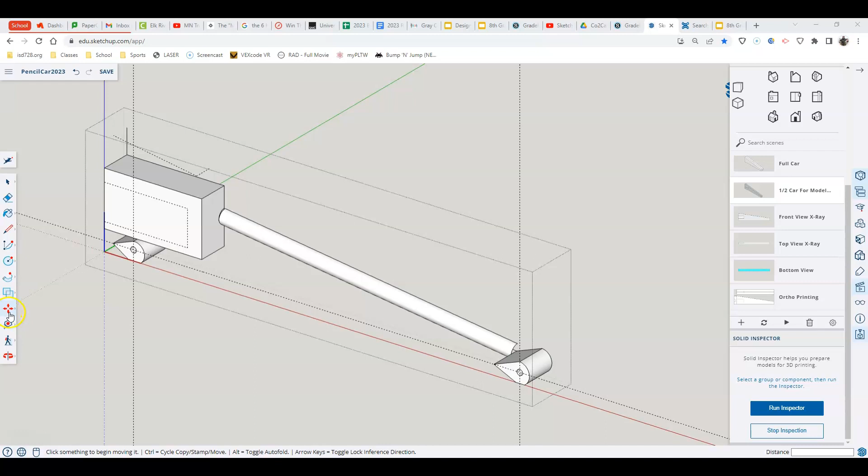Now how we're going to do this is a little bit of combination of the move tool, drawing some shapes and some push-pull tool, but I'm going to start with the move tool, and what I'm going to focus on is this back little edge right here. I don't have anything selected right now, I am double-clicked in already. What I want to do here is match up these points with these little existing points with the move tool, and pay attention. If it makes a mistake, edit, undo.

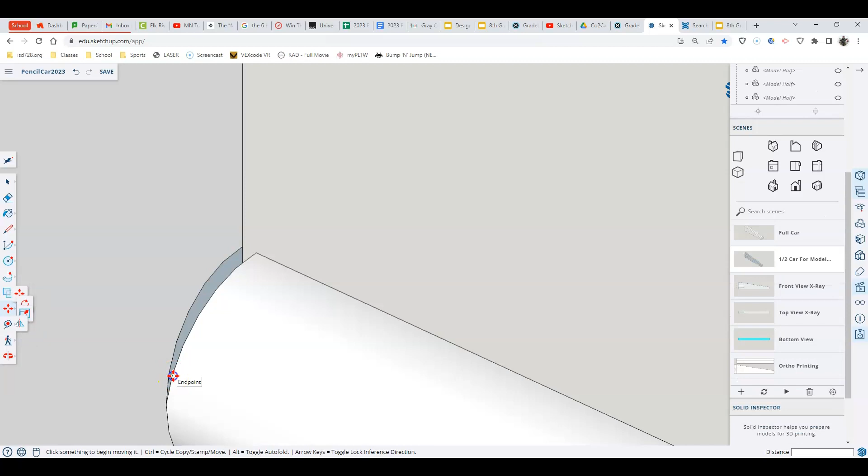So what I'm going to start by doing is just selecting the edge, moving into that point where it snaps to. Slide down until you find the next point, do the exact same thing. So it's kind of like just putting the seam back together. If it looks funky, edit, undo, all right? And I'm almost there. And we have that right where it needs to be.

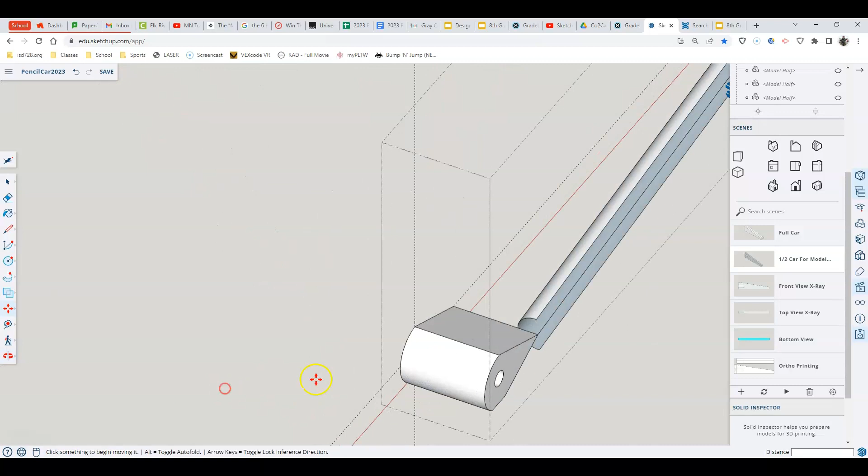Now the next thing is down here in the bottom edge. We could try to do that, but most likely it's going to get a little messy because the shapes are not that similar. So in here, I'm going to draw a circle, and then with that circle, I'm going to pull that forward to connect. So circle tool, hover over the inside right here, should give me access to the middle of this point. At the same time, it's not working for me.

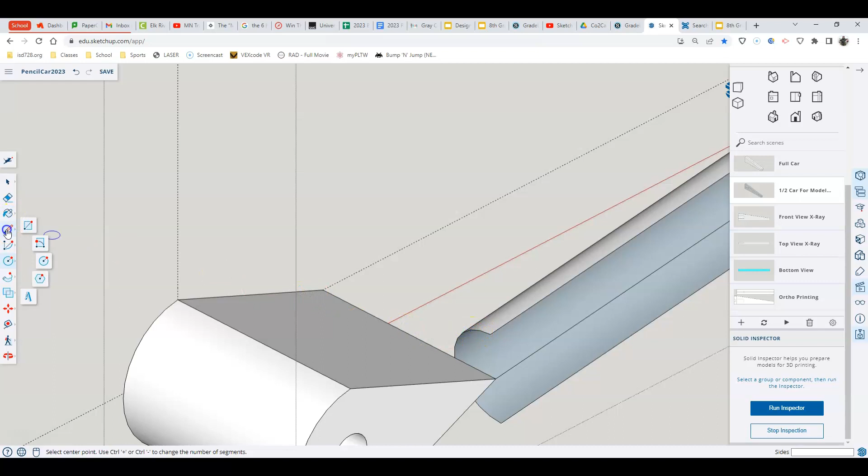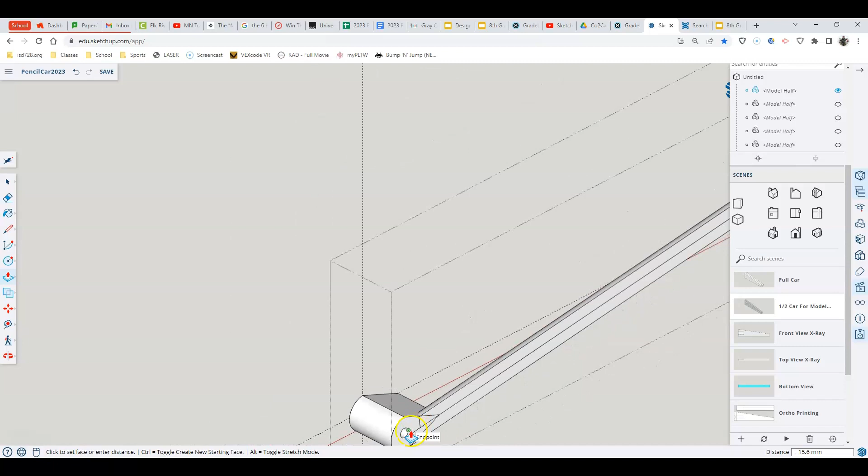So what I'm going to do is draw a pencil line from the end point to end point. Fills that in, and that allows me to use my push-pull tool, which is underneath the follow me that we changed, to push that in until it connects, and then push the bottom surface also until it connects. And I'm zooming out and zooming back in so you can see where that connects. Going a little underneath. Now that we have that inside cleaned up, don't worry about how it looks there. It's all about the outside shape. So we have those two connected.

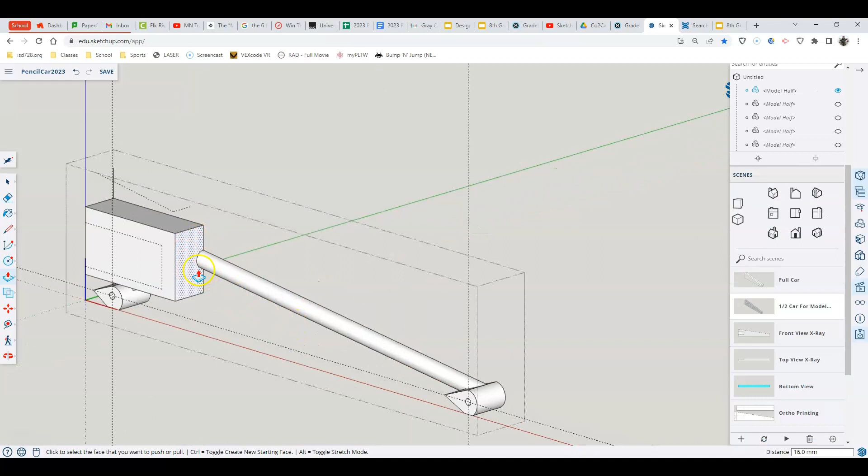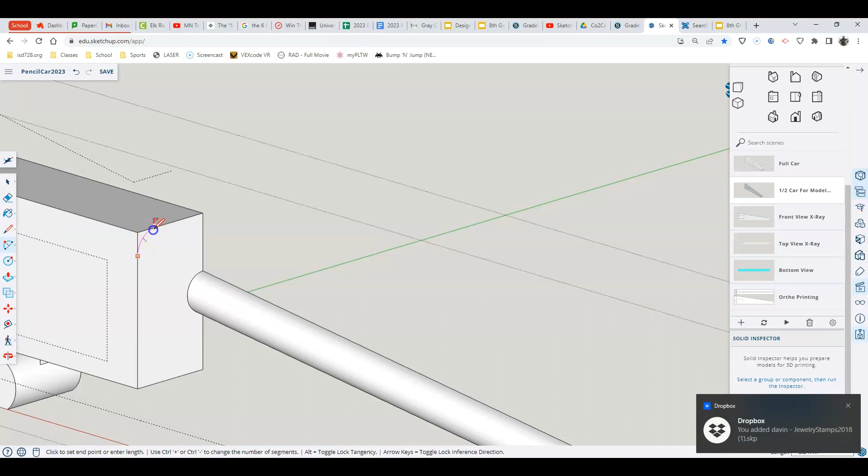The last thing we can do here is change this shape. How I usually do it is by drawing a shape on this surface that's a little different than what it needs to be. It could be you coming in here and taking your arc tool, that 2-point arc, and drawing an arc on the edge with a click, click, and click. And then that could be as simple as you taking that edge and using the follow me tool that we used earlier to select that surface and then follow it back down to that back point. That's how you could take those little points away. I'm going to edit, undo.

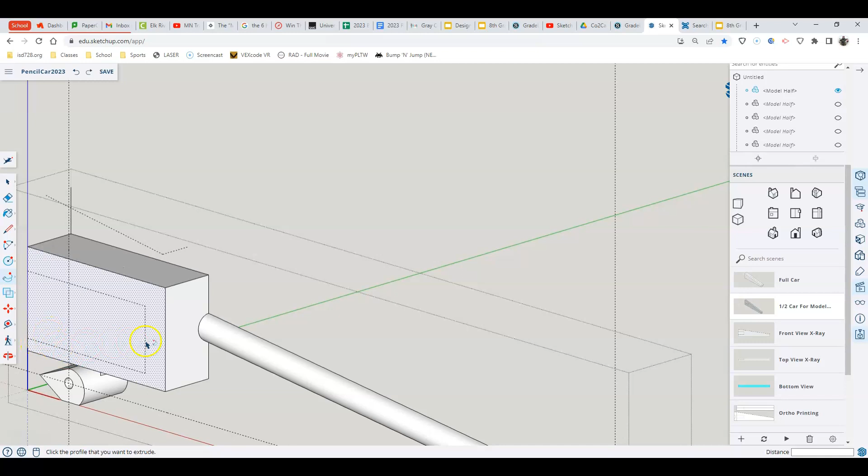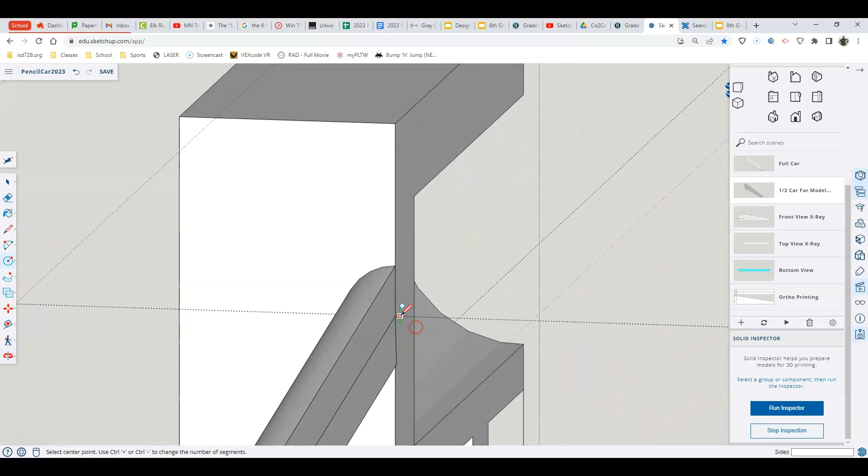That's one example. Another idea would be you coming in here and using that midpoint to draw a circle on this intersection here in the middle. So if I came into here and I drew a circle, the important part is I got to get it so it's looking the right way. It should show up as red, I believe. We want to be sliding down. I don't know why that surface won't lock on that edge.

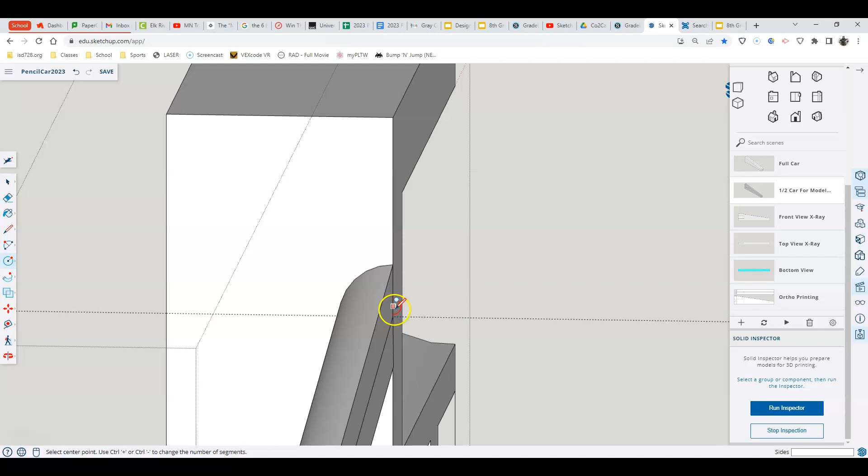And what I did there is I hit the right cursor key when I was hovering above. You notice how it went red and dark red? And I slid down to where that intersection is to click. And then I can slide out, and what I want to do is go as big as possible, the top way, and then just drop that. Don't worry about the back side there. I should be able to just select that portion of it and hit delete.

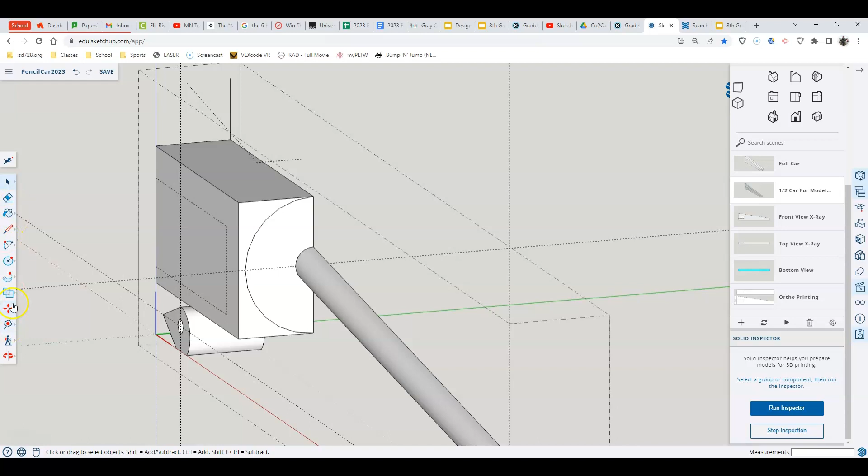But this other side, I should be able to push-pull that back as long as it doesn't crash into my CO2 car housing, with the push-pull tool to make that shape change. If it's crashing into some things, we can hit the control key to stop that, but I just want to see why it's not going. Oh, I see why. It's getting caught on this little edge right here. So if we hit the control key, it'll go all the way past to that back edge.

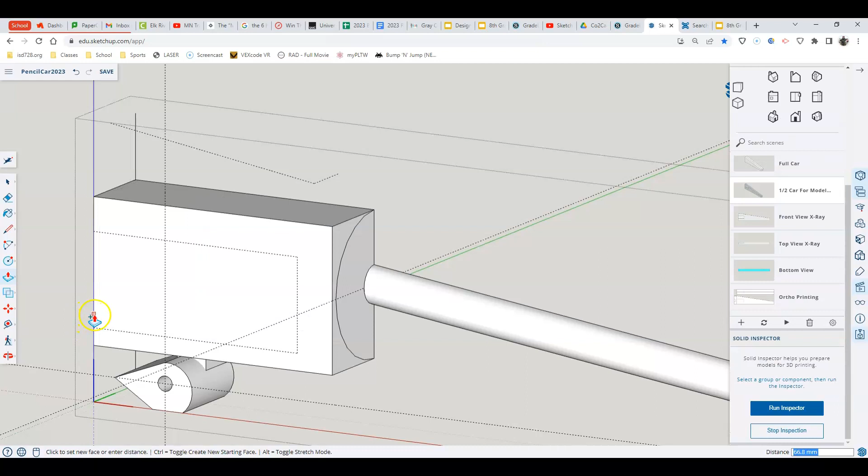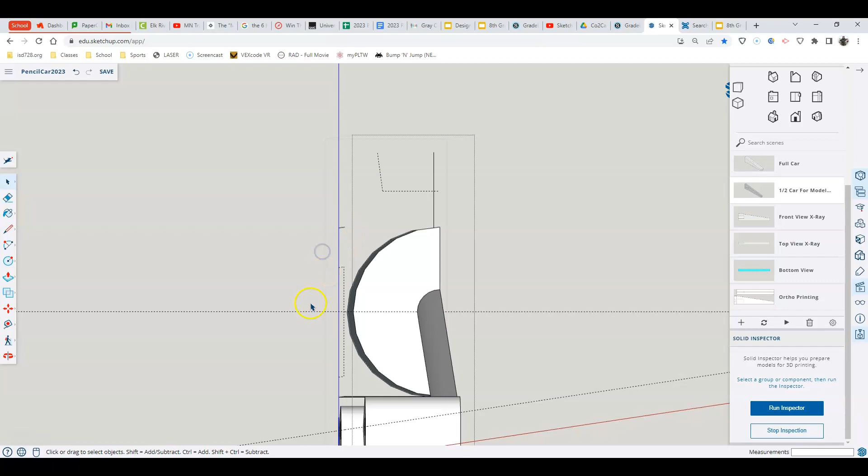And then what we should be able to do is a triple click, right click, intersect faces with model, and then look straight at that, click and drag from right to left, and hit delete to delete that surface out. Any little things that show up there, we should be able to select and hit delete. As long as we did that last step right, we should have all the information still needed. Now, this little portion right here that I ended up making, I'll just pull back up into that space.

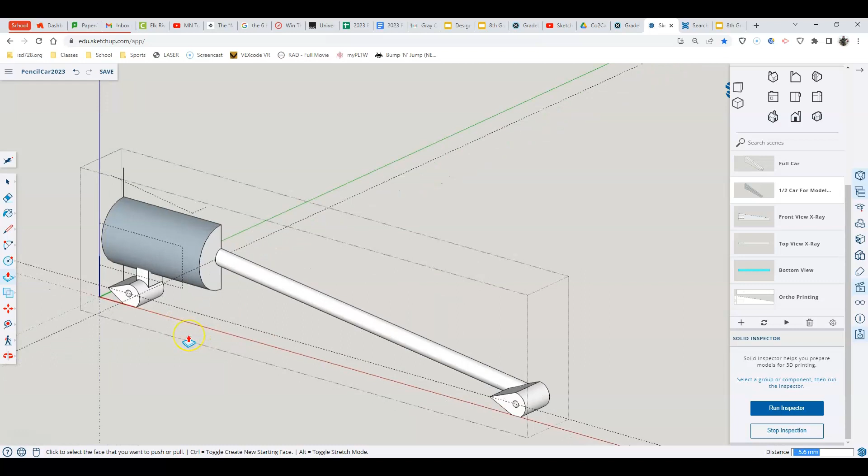If you have any problems doing this kind of stuff, make sure you ask. But that's the idea of how you do this last little cleanup portion. Sometimes we make more work for ourselves, but that is the pencil car. Remember, now we're getting ready for ortho printing. So you're following the 4.5 printing to PDF video to do that submission. Make sure you save your work.